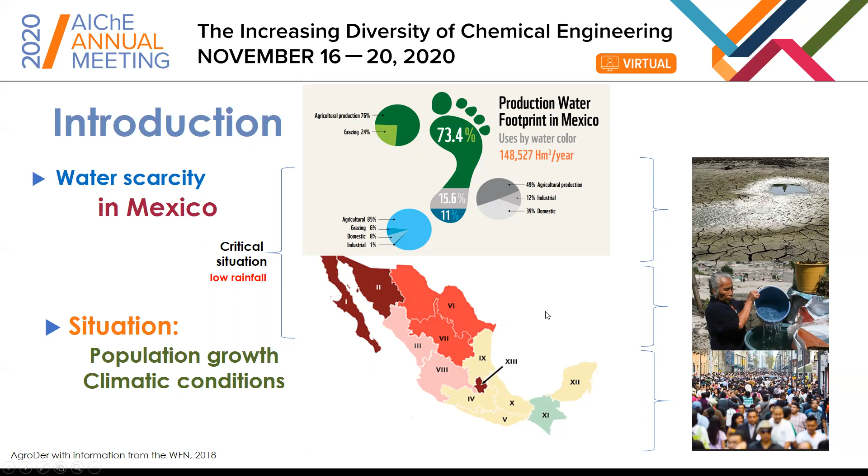With respect to the problem of the water in Mexico, there are areas with little availability of water, and this is due to the climatic condition, that is low rainfall in some areas, and the population growth. In addition to this, agriculture is the sector with the highest water requirements, which is why the exploitation of aquifers is increasing, and with this, the scarcity of water is a fact. The obvious problem of water scarcity leads to the development of new technologies that are capable of generating fresh water. With this, exploring water desalination systems is an attractive option.

The next problem is the high dependence on fossil fuels. So where does energy come from in Mexico? Okay, 76% of the total energy produced in Mexico is from fossil fuels, such as fuel oil, diesel, charcoal, natural gas, and that is by the generation and transformation of the energy. The behavior of the use of these fuels is interesting, and this is due to the low cost and high heating capacities.

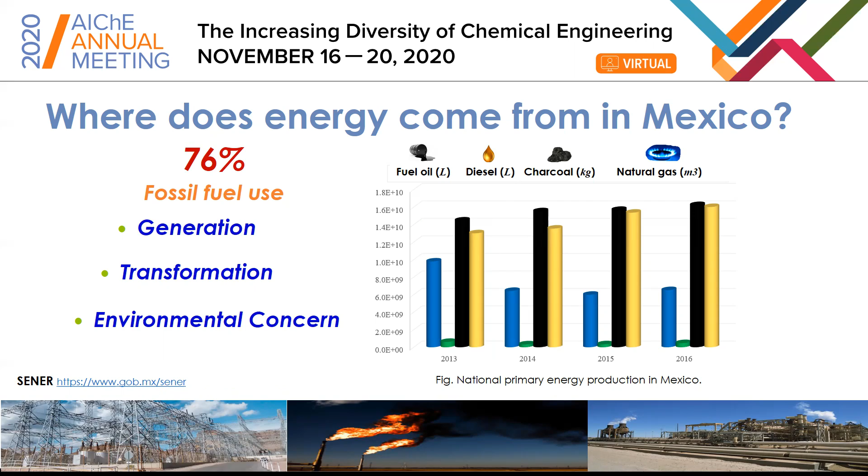But what about the renewable energy? 24% of the total energy produced in Mexico is from these renewables. In this case, 17.29% represent the hydroelectric, the biogas, photovoltaic, wind, and geothermal renewable energy. The rest, that corresponds to 6.83%, are other clean technologies. In this way, renewables are the best able to meet demand for reliable, affordable, and environmentally responsible energy.

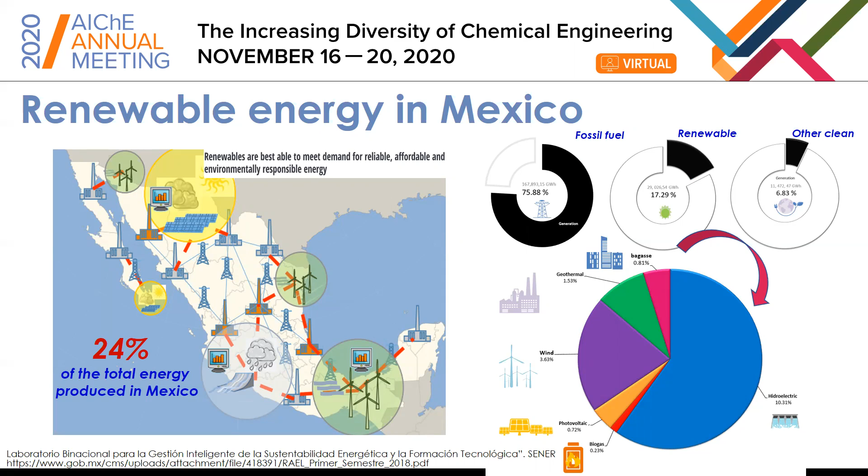In this way, we propose studying the OTEC energy system, that is Ocean Thermal Energy Conversion system. In this case, the use of ocean resources is inexhaustible, and also the ocean represents the largest natural collector of solar energy. This system works using the temperature difference between warm surface seawater and deep cold seawater to produce electricity, fresh water, air conditioning, and mariculture. It works using three kinds of cycles: the open cycle, closed cycle, and hybrid cycle.

In this case, the open cycle works using the desalinated steam from the surface ocean, and this cycle can be used to generate electricity and also desalinated water as main products. The closed cycle works using working fluid steam with a low boiling point to produce electricity. It's important to note from this cycle we just can obtain electricity. And the other cycle is the hybrid, and this is a combination of the other two. And from this cycle, we can obtain electricity and also desalinated water.

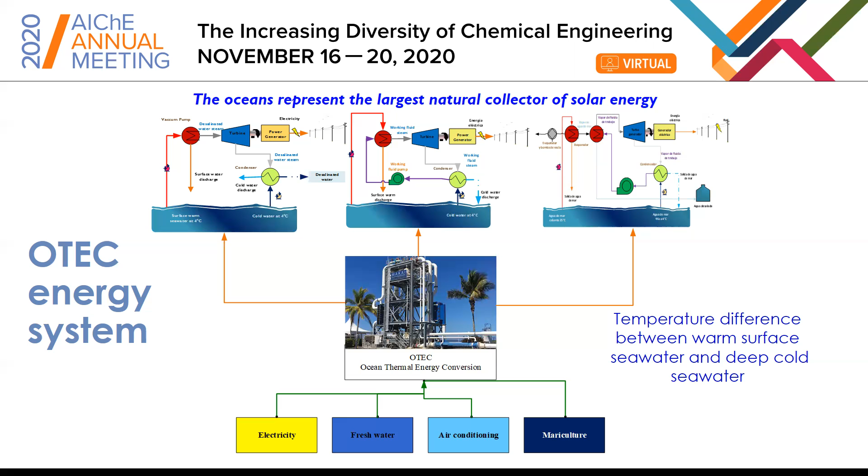But what is the OTEC potential in Mexico? In the maps, we can see the average water temperature with respect to the depth in Mexican territory. And in this zone, the maximum temperature reached is up to 30 degrees, while at 950 meters of depth, temperatures under 5 degrees can be reached. So in this sense, this is a good location in the Pacific Ocean to develop this kind of system.

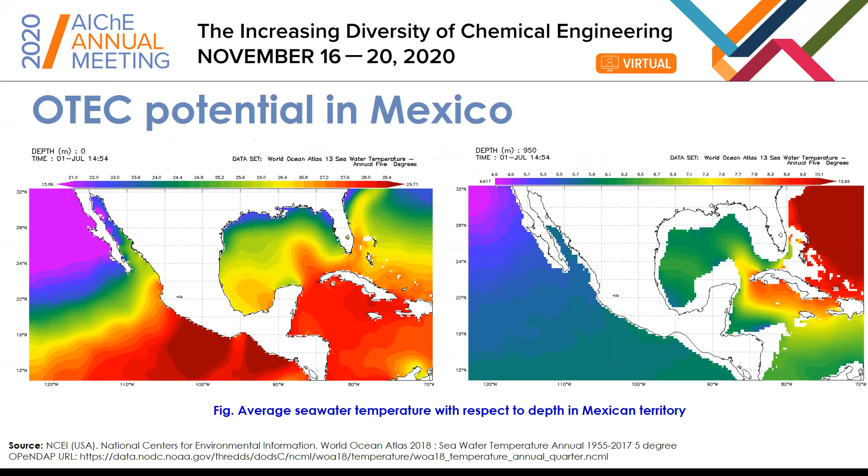The problem statement is the optimization. We are considering the open cycle. In this case, surface seawater is extracted from the surface ocean and sent to a solar collector in order to increase the temperature of the seawater before entering the flash evaporator. It's important to note that the flash evaporator operates under vacuum. With this, the water can be evaporated from 26 degrees. Here, we consider a vacuum pump to extract the non-condensable gases and operate under vacuum conditions.

Then we can obtain water steam to generate electricity, and then the desalinated water steam is condensed using the deep seawater. Also, the water generated can be used for secondary uses in homes, and the cold water in the condenser increases in temperature. Here we seek to return the cold water to a reasonable depth to avoid affecting the environment, or this water can be used for mariculture.

On the other hand, the approach considers minimizing the total annual cost of the system, considering government subsidies such as green credit bonds. It's important to mention that the Mexican government and financial sector authorities consider actions for policy, regulation, risk mitigation, and other mechanisms to support the development of the green bonds market.

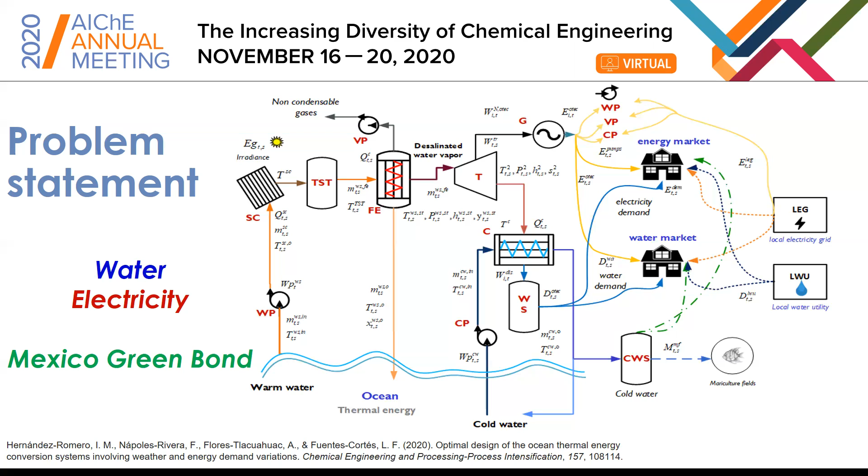We have some design challenges. The first one is the operating condition of the power cycle, that is temperature, pressure, entropies, enthalpies in each point of the cycle, the amount of surface and deep sea water required, the total heat transfer and the pumping, equipment sizing according to the design variables, and the total annual cost of the system. Also, we need to determine the operational policy subject to an existing market.

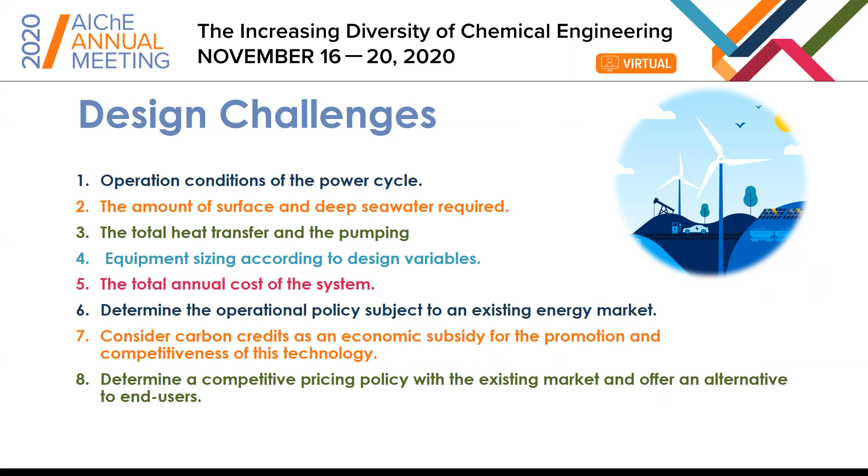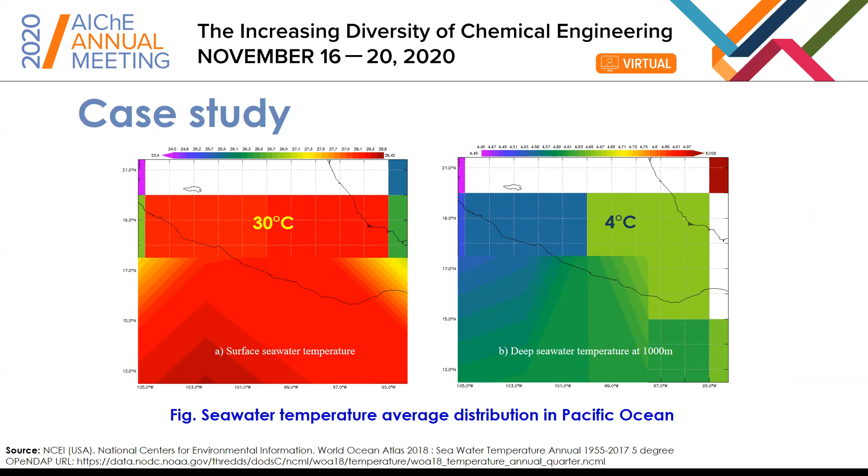Consider carbon credits as economic subsidy for the promotion and competitiveness of this technology. And finally, determine a competitive pricing policy. As case study, we have a location in the Pacific Ocean. As we can see in this location, the maximum temperature can reach 30 degrees, and in the deep sea water, under 5 degrees, so this is a good location to develop this system.

For the solution sequence, we have the electricity and water consumption profiles. We know the ambient conditions, the seasonal variation profiles, surface seawater temperature, deep sea water temperature. In this case, we are fixing it at 5 degrees. Also, the yearly and seasonal solar irradiation. This is to increase the temperature before entering the flash evaporator. The economic parameters, equipment efficiencies, electricity and water price. And finally, the government subsidies.

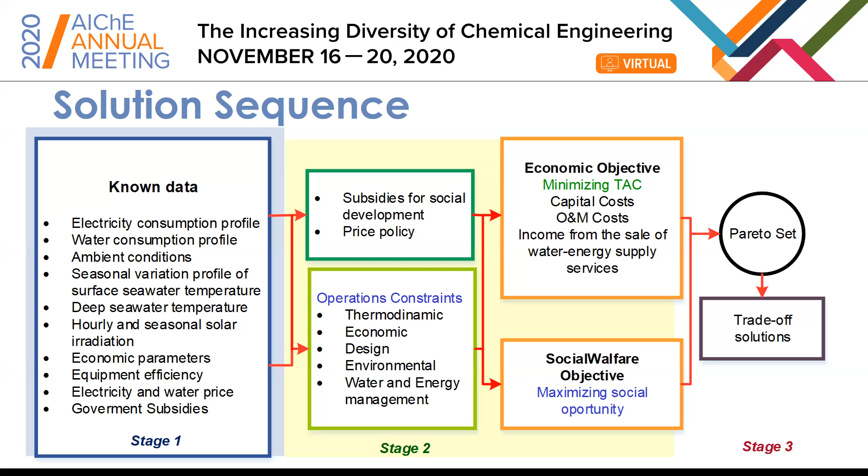Okay, the second stage consists in determining the subsidies for social development and the price policy, subject to some constraints such as thermodynamic, economic, design, and environmental constraints. Finally, the multi-objective approach consists in minimizing cost and maximizing social opportunity as social welfare objective.

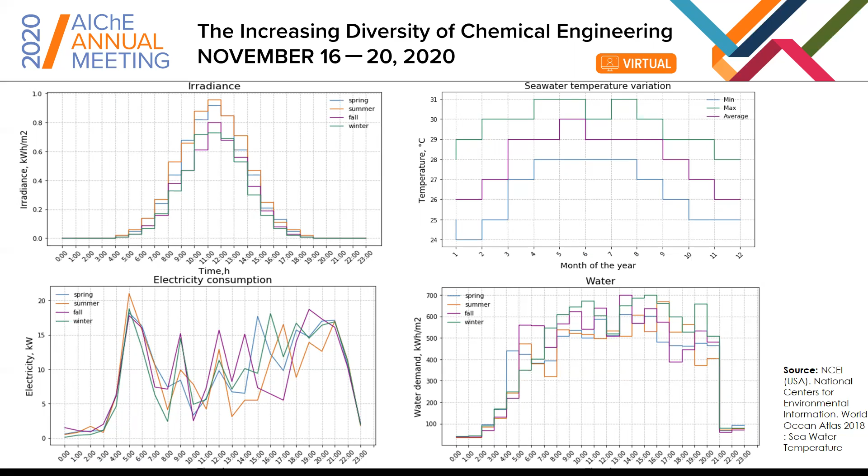We have the mathematical model. It consists of mass and energy equations, design equations, and also constraints. In this case, the constraints are defined by the energy and mass balances associated to operation of the units, size of equipment, and water and energy demand profiles. In the distribution, we have some demand from the market that can be supplied from the OTEC system or the local electricity grid. And the same case for the water.

And it's important to mention that we are calculating the emissions generated by the OTEC system compared with the local electricity grid. We need to use this to calculate the subsidy from the government in order to mitigate the emissions.

Another important thing, we can see the OTEC system uses three kinds of pumps: the pumping of the warm and cold water, and the vacuum pump. These pumps can be operated using electricity from the local electricity grid or from the OTEC system. If we operate from the OTEC system electricity, we don't have emissions from this technology.

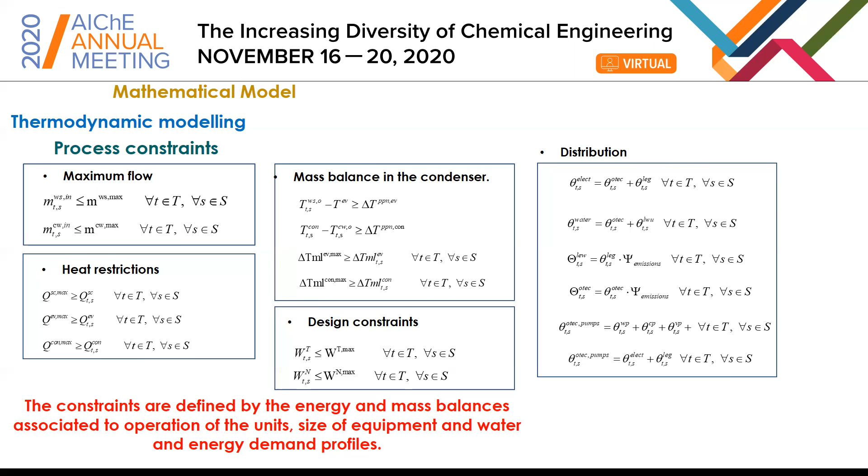Okay, we have an equation from the economic assessment that consists in estimating the operational costs, maintenance costs, and capital costs of the equipment. Also, the multi-objective approach consists in minimizing the total annual cost and maximizing social welfare, subject to water and energy demand profiles, that is the upper and lower bounds from the market, and the price that we have to constrain to lower and upper bounds from the market.

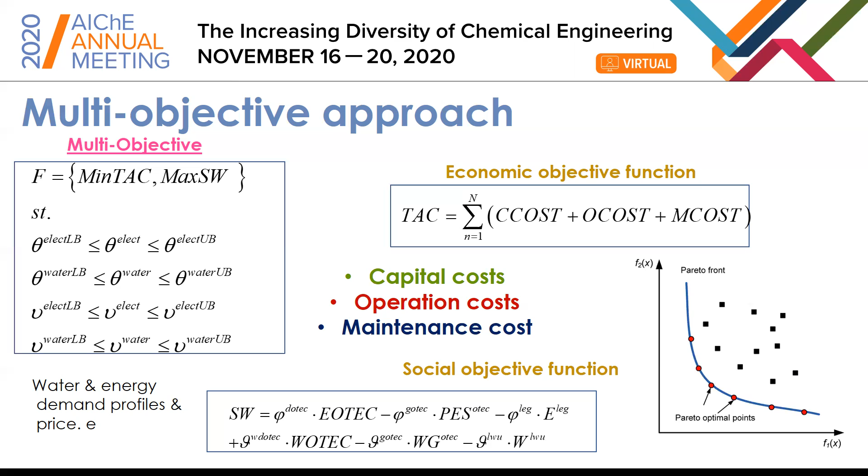The economic objective function consists in minimizing the operational, capital, and maintenance costs of the system, and the social welfare consists in maximizing the social welfare function, maximizing the demand served, and minimizing the cost of the supply. The required demand is considered, which can be supplied by the local grid and which can be supplied by OTEC, as well as the cost of each one. The same case for all the products derived from the cycle. The government subsidy is also considered in order to reduce the final cost.

The final remarks. The model considers the nonlinear behavior associated with the design and operation of equipment. The formulation allows selecting the optimal configuration, the operation policy, and the sizing of the OTEC plant. The model aims to analyze ocean thermal energy from an economic and social point of view, and considering green bond credits as a government subsidy allows the generation of opportunities in the development of new technologies such as the OTEC system.

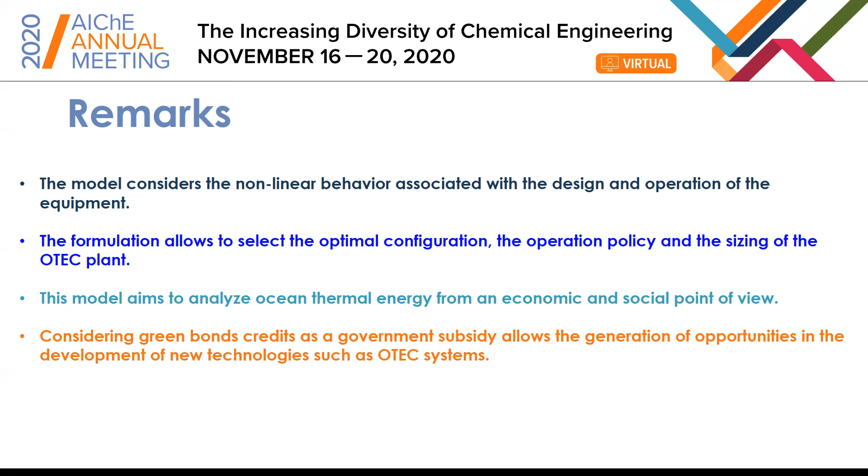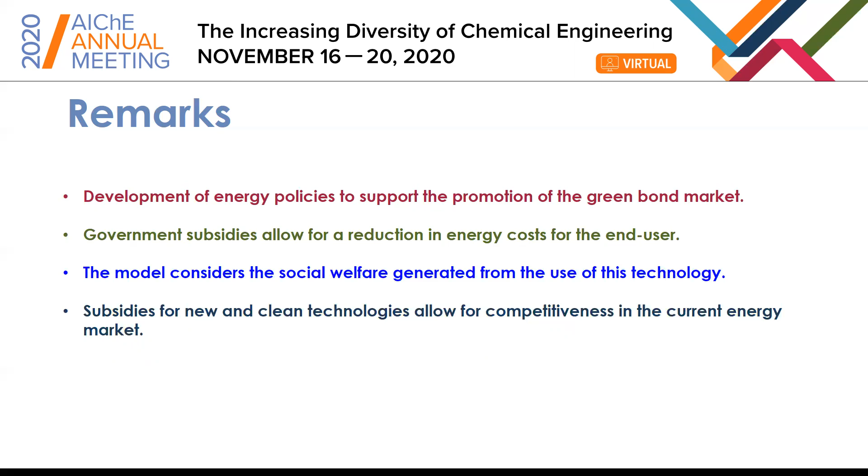Developing energy policies to support the promotion of green bond markets and government subsidies allows for a reduction in energy costs for the end user. The model considers the social welfare generated from the use of this technology. And finally, subsidies for new and clean technologies allow for competitiveness in the current energy market. And now, based on the proposals described, we are working on the results, and that's it.